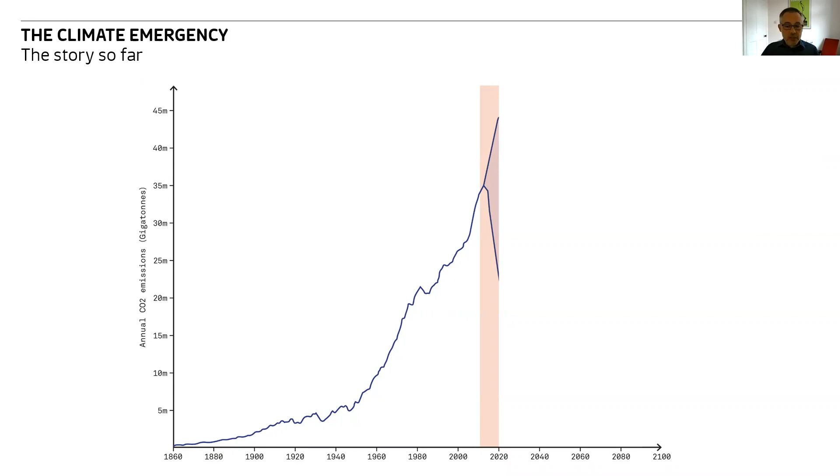But whichever path we take to limiting temperature rises from here on in, we've got to start now. In the next decade, we need to turn that line through 180 degrees, and we've got to halve our annual emissions in the next 10 years at a global level. I think it's probably fair to say that's the biggest political, social, economic, and technical challenge that we've ever faced.

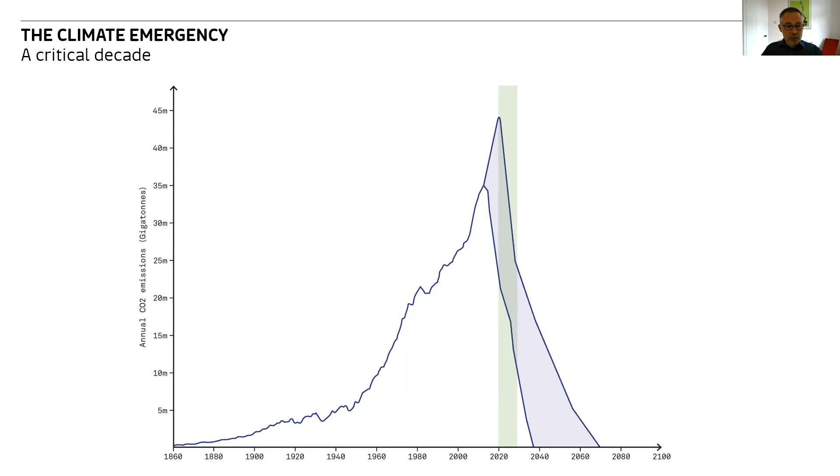So we're very much at a pivotal moment. We're at a critical point. There is now broad global alignment, and the world's biggest polluters are either coming on board or coming back on board. Ambitious targets are being set, laws are being established, the frameworks are being put together, and all of that's great. But we have to remember we've not really yet achieved anything. We appear to still be moving away from, not towards, net zero. So the COP summit in November is going to be an absolutely pivotal moment, and I think the big question is just which way we're going to pivot.

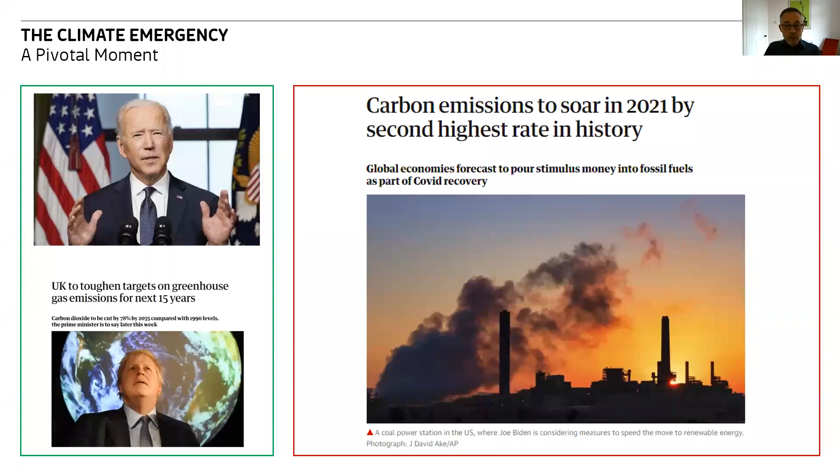The UK is one of the relatively few nations that have enshrined carbon reduction commitments into law. And the strategy that they've developed really says we need to minimise our emissions as far as possible and down to those which are genuinely unavoidable. And that's absolutely key, because we then need to balance those unavoidable emissions with removal of carbon from the atmosphere.

And we only really have two tools available to do this, and neither of those has been delivered at the scale required. Afforestation, planting of trees, and carbon capture and storage simply haven't been tested at the scale required to deliver complete offsetting of our emissions as they are at the moment. So clearly, reduction is the key part of this equation, and there isn't a magic bullet that's going to solve all of this for us.

So I wanted to talk a little bit about carbon reduction commitments that are arising that lots of organisations are making, and what's the framework which underpins all of this? What are the rules, and how are the rules evolving and changing over time?

So first of all, institutional commitments - it's very much a top-down process, or it has been so far. There are top-down commitments being made. The government targets have led to institutions recognising that they need to act, and recognising that they need to build in tolerance so that they can deliver on the 2050 target by meeting net zero earlier.

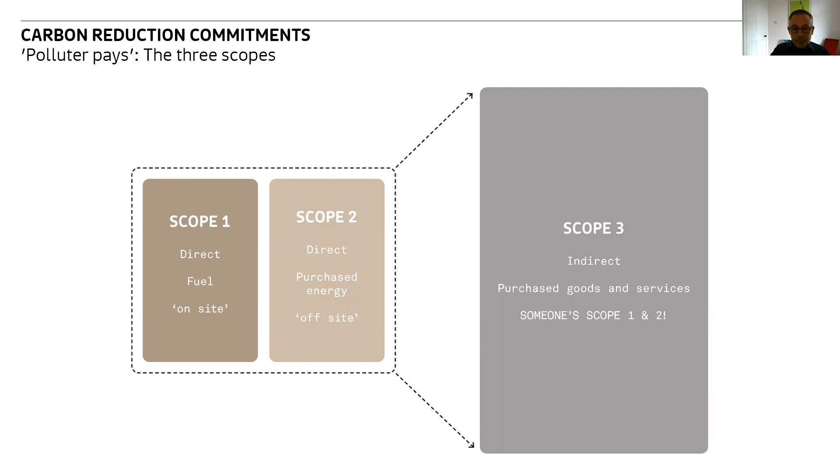So what do the institutional commitments that have been made mean? Well, in general, the net zero commitments being made by institutions typically refer to scope 1 and 2 only. So again, is scope 3 someone else's problem?

I think the focus of procurement, in terms of time and effort spent, is going to largely be on products and services which result in scope 3 emissions. And as purchasers, we have a key role in influencing suppliers to deliver improvement, as do we as consultants. So scope 3 emissions are in effect a shared responsibility and sit firmly within our scope of influence as purchasers and as a supply chain.

There are other factors around this. Energy decarbonisation has an effect. We are decarbonising energy faster than most predictions. And with my optimistic hat on, we will get to net zero operational energy in advance of 2050. But as we decarbonise that energy supply, scope 3 is brought much more into focus.

Organisations, including universities, will start to set firm scope 3 targets, which we know from speaking to institutions are being developed. Key to that, purchasers will need to influence suppliers to demonstrate significant carbon reductions - this shared ownership of scope 3. So universities' scope of influence is really going to drive change in manufacturing and services.

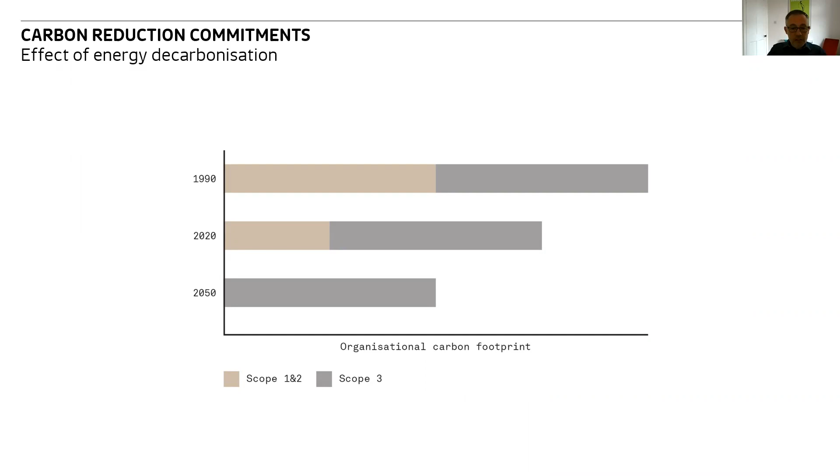So, I'm an architect. Clearly I'm interested in and have a specialism in buildings and the built environment. So I'm going to talk a little about how construction needs to respond to this challenge, and about what we as designers and consultants are learning.

We know that construction is a major contributor to all 3 scopes. Buildings are responsible for something like 40% of global emissions. 10% of that is through construction, which is scope 3, and 30% of that through operation, which is a mix of scope 1, 2, and 3. So it's a substantial problem we need to address.

As architects, we can influence reduction in all 3 scopes. So it's not just about reducing the energy use of the buildings we design. Sustainable master planning, which influences behaviour, maximises utilisation of assets, and minimises embodied carbon across campuses and estates, is vital. Focusing more and more on retrofit and refurbishment.

It's said the most sustainable building is one that's already built. But when we do build new, because sometimes we will have to, we need to build long life, loose fit, low carbon buildings, and we really need to start to reuse and recycle more of the materials we use in our buildings. All of these things will contribute to reducing the scope 3 emissions.

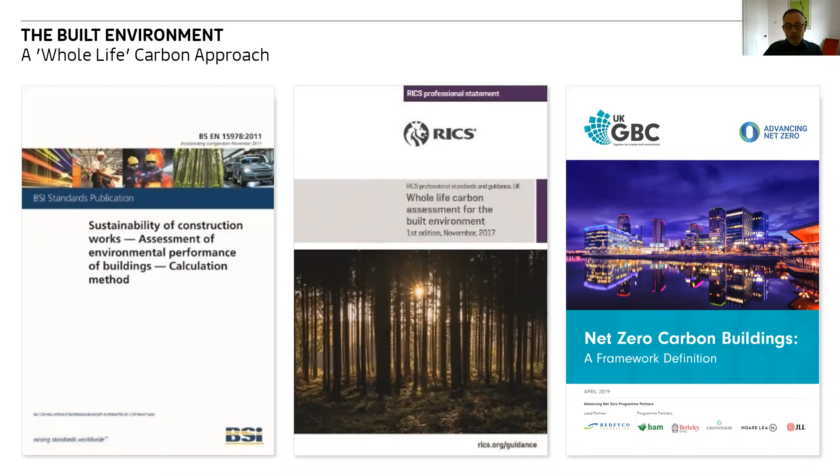So there are clear frameworks, and I think, unfortunately, it's fair to say these are still not necessarily fully understood or widely followed across the industry. I think there is variation there.

But if we think about the life of a building, whole life is key. We need to think about all the emissions associated with a building that we might create. So we need to look at scope 1, 2, and 3 across and beyond the life cycle of a building. The framework sets out 4 modules of emissions, A to D, across the top there. They talk about, first, module A - the construction emissions, the upfront embodied emissions that arise from the extraction, processing and manufacturing of materials, and their delivery and assembly on site.

That's all scope 3 emissions. Module B is about the lifetime of the building, and by default we assume a 60-year life for buildings. During that time we've got the in-use carbon from the operational energy that the buildings use, scope 1 and 2. But every time we need to repair or replace a window, a facade or a roof, that also is responsible for an emission of scope 3 carbon, embodied carbon.

Then module C at the end, the inevitable end of a building's life, whether that be 25 years, 50 years or 100 years in the future, there are scope 3 emissions built into the design of the building, embodied emissions from the outset. There is an energy implication to dismantling and disposing of the building.

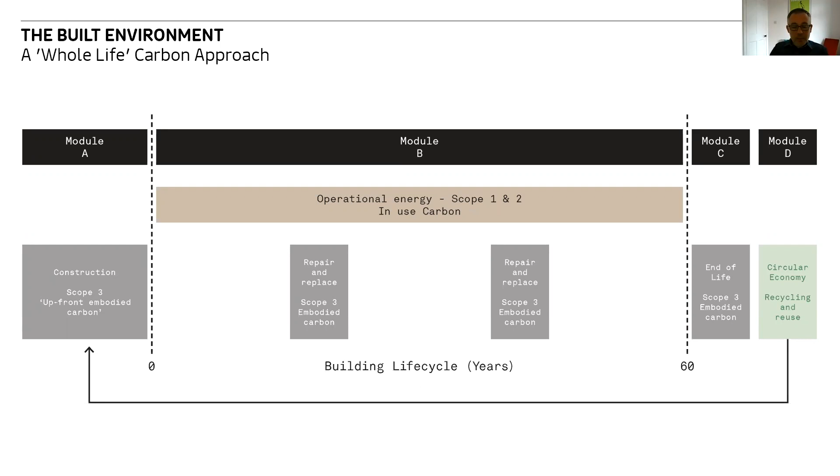So the framework is all in place. We know what we need to do. We know the framework is there for how we achieve it, and we will need to make progress, significant progress over the coming years.

So I wanted to talk a little bit about our journey so far as an organisation, as FaulknerBrowns. We're clearly a design consultancy. We're part of a wider supply chain, and we recognise our responsibilities to play a significant part in carbon reduction. We're a relatively large architectural practice, around 100 employees in Newcastle and in Vancouver, but we're tiny in relation to the smallest university.

We have signed up to the Architects Declare a Climate Emergency, and what that means to us is that we understand the need to make urgent and significant reductions in emissions. We also recognise that as designers, we've got a key wider role to play. We're recognising that this is going to touch every area of our business, and that we need to start now, and that's what we're doing.

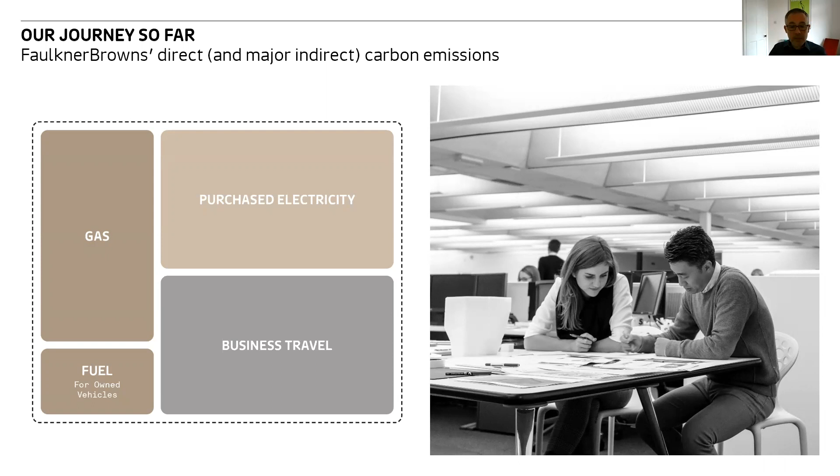But there is another angle to this, and really that is about what I've termed our scope of influence, our wider impacts through the projects that we deliver, through the whole life emissions of the buildings that we design, potentially dwarfing our direct and indirect emissions by a factor of 1,000.

If we were to design the buildings that we delivered in 2020 purely to meet regulatory standards, we're looking at potential whole life carbon emissions of those buildings of something around 200,000 tonnes. So 1,000 times the emissions that we actually incur through running our business.

That's huge. We're not in full control of those emissions. We clearly work as part of a team, with clients, with engineers, with other specialist consultants. But if we only deliver a 10% reduction on that total through the design decisions which we control ourselves, then that alone is 100 times our direct and major indirect emissions.

I think the reality is we typically deliver much greater impacts than this in almost every project we do, but we need to be doing more. The RIBA and other organisations are setting out targets that suggest we need to be looking at 50 to 75% reductions in those emissions over the coming years.

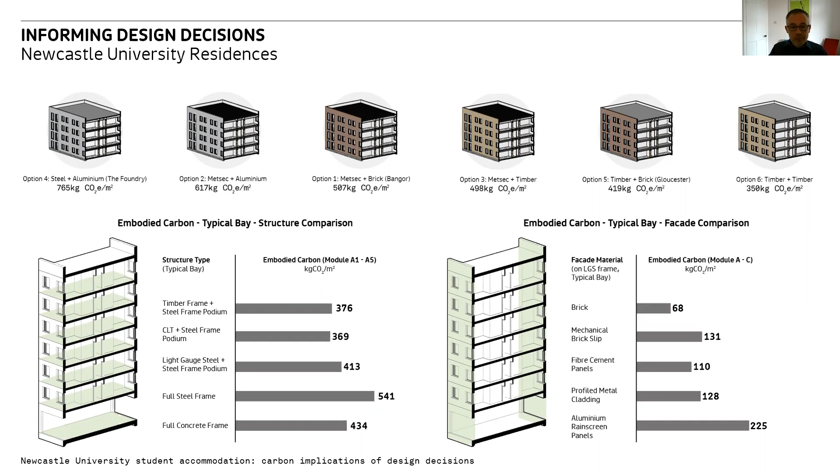And that learning process is vital. We deliver some great projects, and we're really proud of the buildings we produce, and we can learn a great deal from our successes, even when perhaps they predate some of the current understanding and frameworks around embodied carbon.

For the Mountjoy Teaching and Learning Centre that we delivered around a year and a half ago for Durham University, we know that delivers significant social benefit for students. It's a focus for the university to reform its curriculum and develop its pedagogies. It releases underutilised and dispersed space across the university for reuse, to support growth and the wider social impact of the university.

A whole life costing approach to that envelope was adopted to develop a long life, loose fit, and very much modular design. So the component life, the design lives of the elements of the building, have been aligned to the life of the building wherever possible.

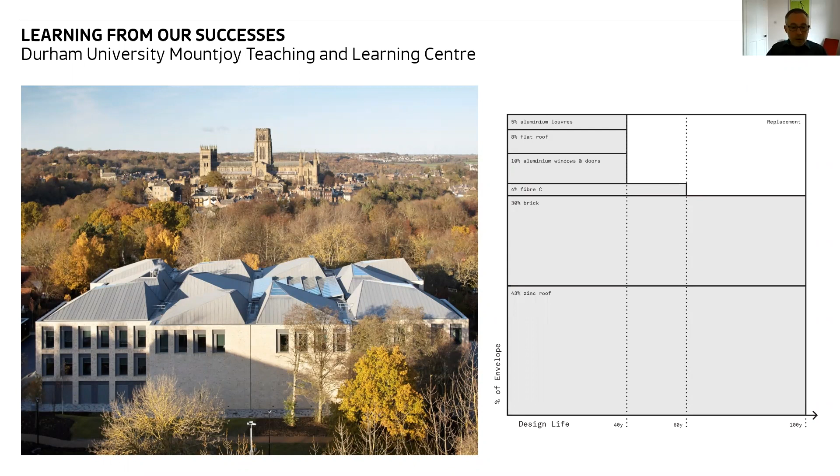So really what we find is good design decisions and good carbon decisions often align, and we need to learn from those and take them through all of our projects.

We work with universities at a strategic level to inform their future estate plans, and there are carbon intelligent decisions we can make at those stages. At the University of Liverpool, we're supporting the university's master plan and their response to the challenges and opportunities that come out of COVID, helping to target a right-sized and effective estate, a collaborative, supportive and sustainable campus, and really maximising the benefit of the assets the university has to support the well-being and success of students and staff. Clearly, doing that with the minimum carbon impact is important.

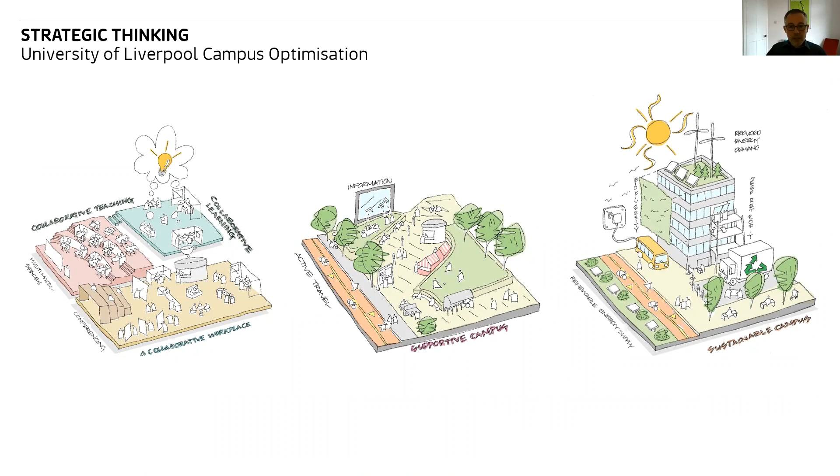We are seeing an increasing focus on reuse across all of our work, not just in universities. This doesn't have to be a compromise. We've recently completed Teesside University's Business School, which was a refurbishment of a 1970s library building, remodeled and retrofitted to create a new business school, effectively a new building. So all of that embodied carbon locked into the building's substructure and frame, we're extending the benefit of that, as well as delivering significant savings in energy use.

We're also helping to set the agenda. We work with the Department for Education to help define the framework for the future school buildings programme. The next generations of schools are intended to be net zero in operation and low embodied carbon. They'll be fossil fuel free and will follow passive house principles. Many of you will be aware of the passive house standard, which sets very stringent low energy targets for building design. And really the key challenge we've identified on that project is meeting energy demand with on-site renewable energy generation.

I think what it highlights is that large organisations, whether that be the DFE or universities, need to think about energy provision at an estate-wide level, not a building level. It needs to be solved at a systems level.

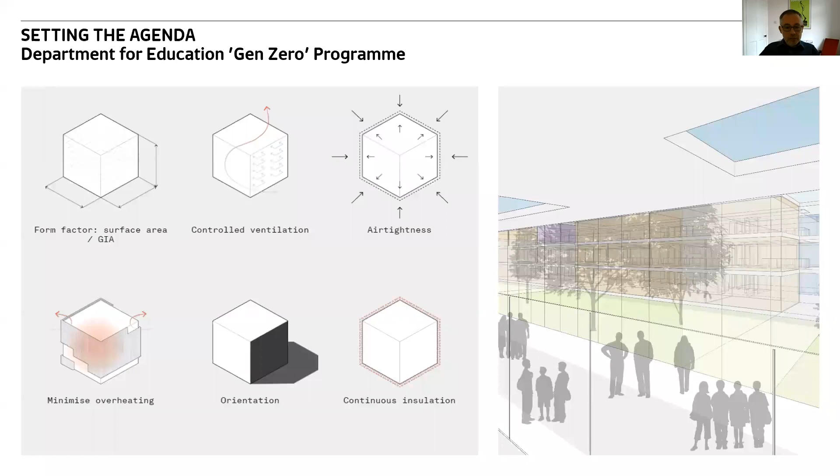The final example I'll share is one we're incredibly proud of: a new sports centre currently on site for the University of Portsmouth. There was a brief requirement to achieve BREEAM Outstanding.

The Building Research Establishment's environmental assessment method sets a series of tiers for energy and wider sustainability performance, covering social, economic and environmental considerations. To achieve Outstanding, the highest tier, we have to do everything right—from the earliest decisions, a sustainable location, a holistic approach to environmental performance, well-being and biodiversity. We had to make all the right decisions.

In relative terms, it's a high energy and high carbon building type—it has a swimming pool within it. We need to reduce that significantly, but also maximise social value. Again, a building that nobody uses still emits the carbon. We need to get maximum value from it.

I think it's fair to say the project largely became about minimising energy and carbon to meet this quite stringent and challenging standard. So every decision was important: the right organisational approach, a focus on achieving comfort, efficient systems, high performance fabric, and incorporating renewable energy generation. Doing all of these right things gets us close to net zero carbon for the building.

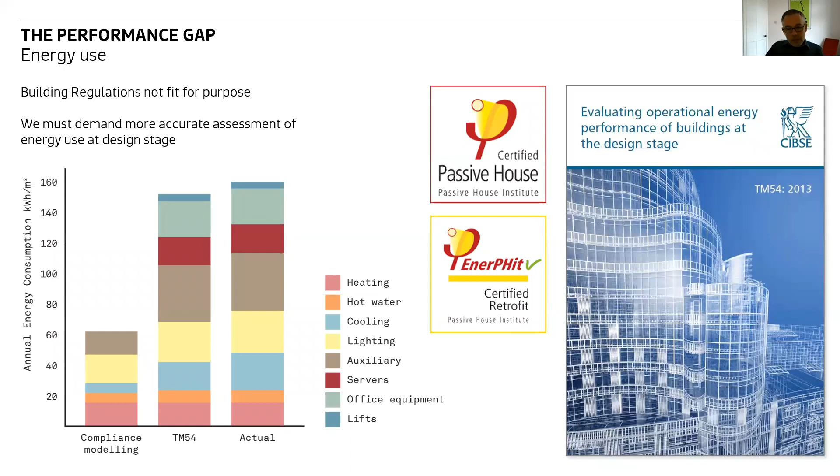So that's a critical aspect for us. And the other part of the performance gap is quite a specific one that we're seeing time and again across projects, and that's about air leakage and air tightness of buildings. That's a critical performance metric that helps us achieve low energy design and therefore low scope 1 and 2 emissions.

So regulations are completely out of kilter. The other aspect here is that contractual targets are often insufficient. Air leakage is nobody's responsibility. It happens at the interfaces between different trades and between different parts of the building, and by the time the tests are conducted, it's usually too late to rectify the problems.

So that's a challenge that we face. Our sense is that air tightness champions who can really lead and have responsibility and accountability for air tightness are an essential part of a contractor's team. I think clients must ask contractors which named person will be responsible for ensuring that all of those gaps are closed. And I think you should expect a named individual with the experience and the power to assure compliance with the standards that are set. Otherwise, there's a gap there that we won't be able to close.

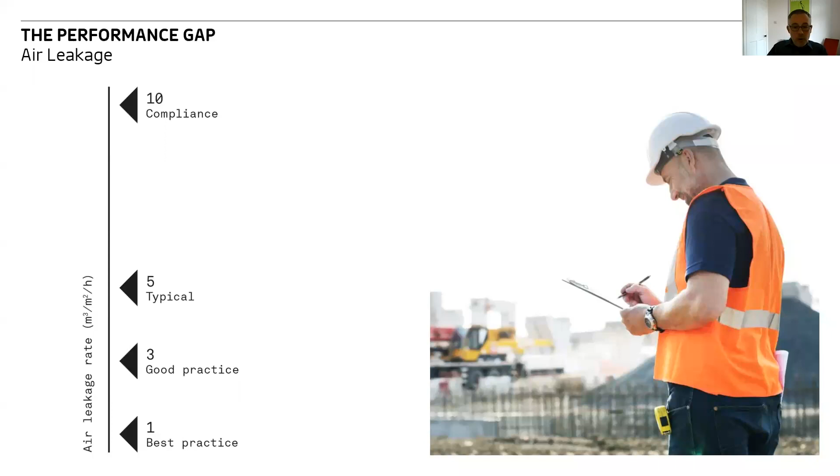So, in terms of embodied carbon, some of the lessons we're learning, the emissions that arise from the extraction of materials, the fabrication of systems, and then their transport to site and assembly into buildings - that's a key area as I've talked about. Really the question we've been developing answers to over the last few years is where do we need to focus to maximize our impact? How do we support and promote change? And where can we have the biggest impact? So there's a few threads there.

First of all, we know that we need to refurbish, refit, and reuse much more. Structure and facades of a building can account for round about 60% of the embodied carbon for most building types. But where we must build new, this should also be our area of focus. So we need to use less material. As I said, compact, simple building forms - that gives us low energy use, but also material efficiency, and it helps to reduce cost.

We've got to use the right materials for the job. We're not talking about building buildings out of straw bales and very, very low carbon materials that don't meet performance requirements. There's got to be no compromise on performance. Materials have to be long life and not require replacement during that life. And where they do require a replacement, that replacement's got to be as easy as possible. We've got to use systems that can be repaired rather than fully replaced. And clients are in a position to demand that.

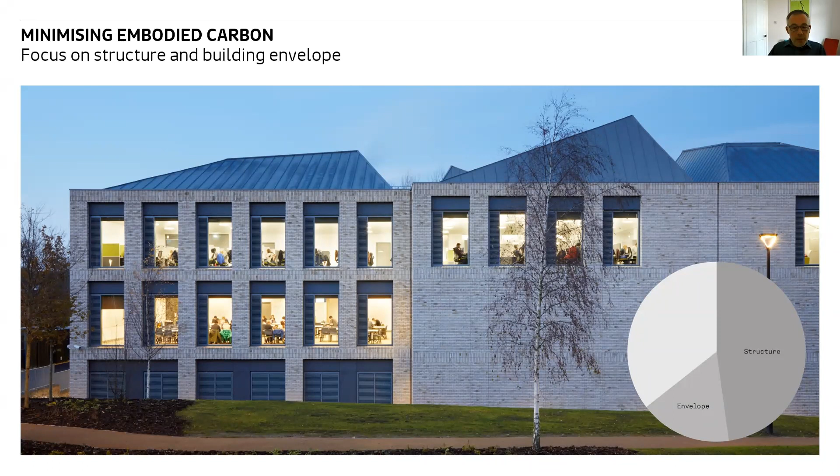We've got to start to move much more towards a circular economy, maximising the recycled and recyclable materials in our buildings, both inputs and outputs. Really that's the key to delivering the maximum carbon reduction. We've got to design for reuse of almost every component within the building. And there are ways that we can start to do that.

So there are some strategic design decisions that make a big difference. We can model whole life carbon and we can use generic benchmarks for materials. But one of the questions we're coming up against frequently is how do we make informed comparisons between materials and products? How do we validate suppliers' competing claims? And how do we maximize our scope of influence and support the adoption of more sustainable processes?

There's increasing adoption of environmental product declarations, and these give definitive data on emissions performance of products, and they're particularly widely adopted in the furniture systems and fit out end of the building spectrum. They're available for the most frequently replaced building components like windows, and clients demanding EPDs, and as designers us writing them into our specification requirements, will drive wider adoption and ultimately the ability to deliver carbon reduction. They're a verifiable way of evaluating and comparing performance. So we can write them into our specifications, but very much this needs client support, and therefore it needs to be part of the value system for a project from the outset.

And the final thorny issue is the one of cost, the question of what price sustainability really. It's a complex picture, as you'd expect. We've been asked by clients recently what sustainability costs, and really that's an impossible question to answer. Largely, as I've tried to bring out through the case studies, it's about making good design decisions at the right time, and these are intangible, impossible to allocate a cost to. In a sense, clients are asking what good design costs, and I don't think we've ever been able to answer that. But some decisions will clearly increase or decrease cost, and what's critical, as with measuring carbon, is establishing the timescales and the scope we're measuring them across.

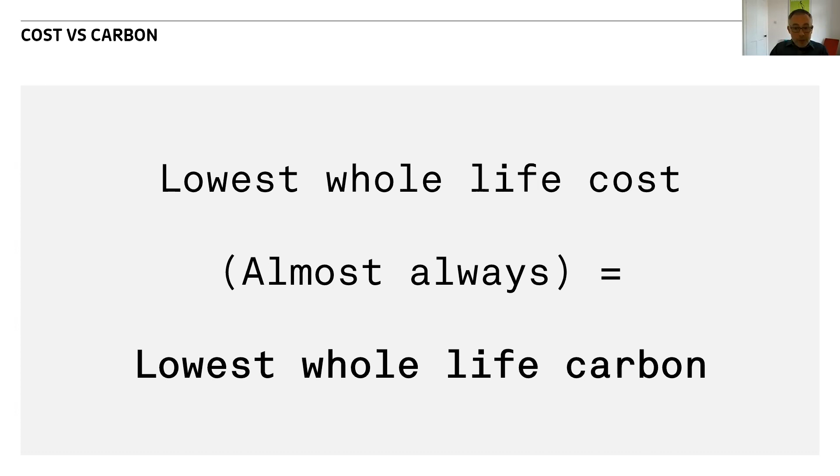So the key lessons that have come out for us: lowest whole life cost is almost always the lowest whole life carbon solution. Through the work we've done with Durham University at Mountjoy, that's really illustrated for us that if we have a low energy, low maintenance solution with a long life that can largely be reused at the end of its life, that will deliver the lowest cost and lowest carbon over that whole lifetime, almost every time. In comparison, lowest capital cost almost always won't deliver that outcome - it's invariably not the lowest carbon solution.